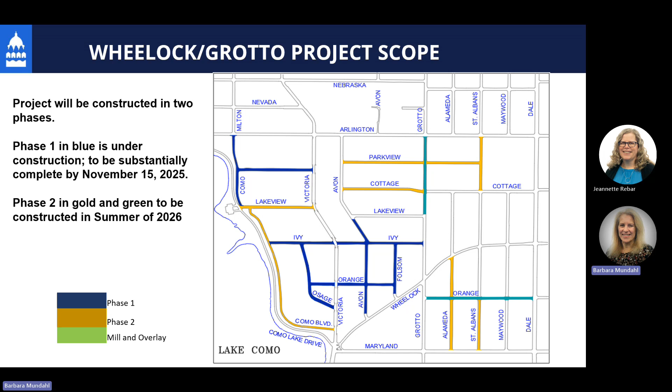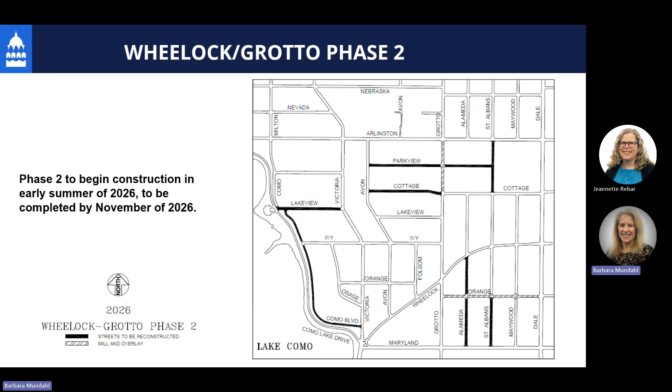Some schedule information. Last June in 2024, we sent out a notice to the neighborhood saying this is coming. This virtual presentation will be posted on the website on October 1st. We'll have an in-person open house on October 23rd at the Northdale Recreation Center.

After that October 23rd meeting, we'll have virtual office hours on November 6th after everyone's had a chance to view either one of the presentations. That open house will be to answer any additional questions.

There is a public hearing scheduled in front of the City Council on December 10th. Another opportunity to express opinions before the City Council. This is not design details, this is just approving the funding so the project can go forward.

I am happy to meet with individual property owners by appointment, and that can be ongoing throughout the winter and spring. Just give me a call with your questions.

We do plan to open bids February of 2026, and then lead water service replacement by the St. Paul Regional Water Services should begin in early spring around April. The street reconstruction will follow those lead service replacements, around May. Of course, all of this is weather dependent.

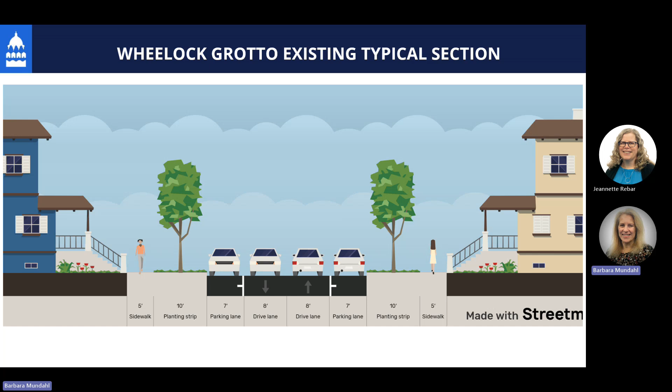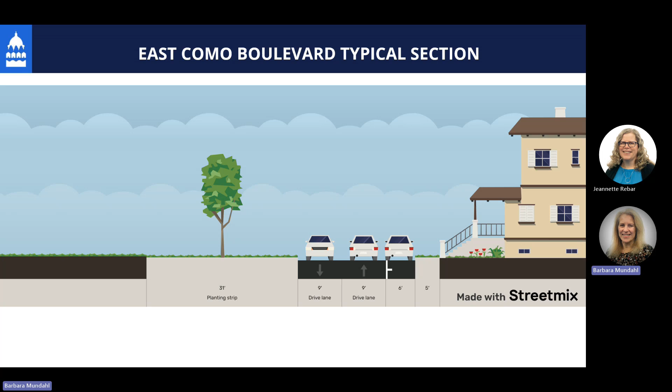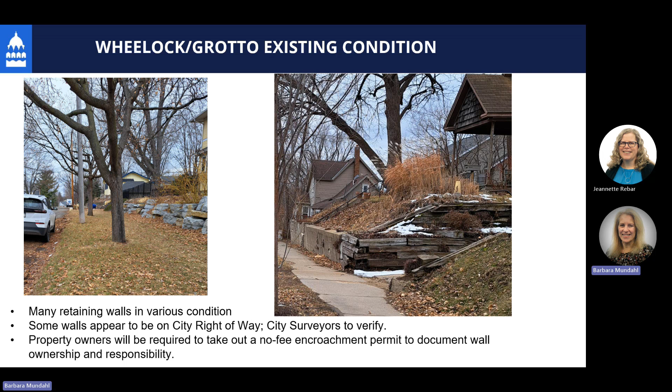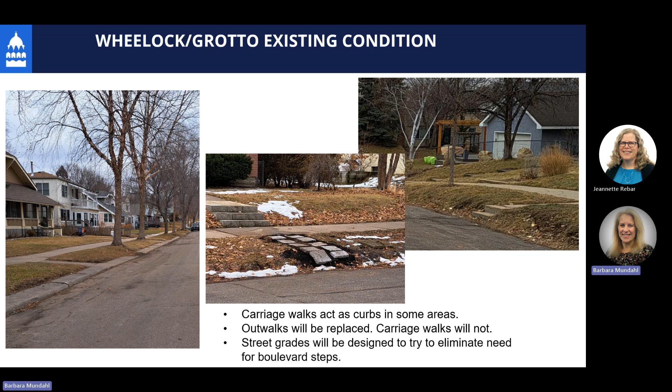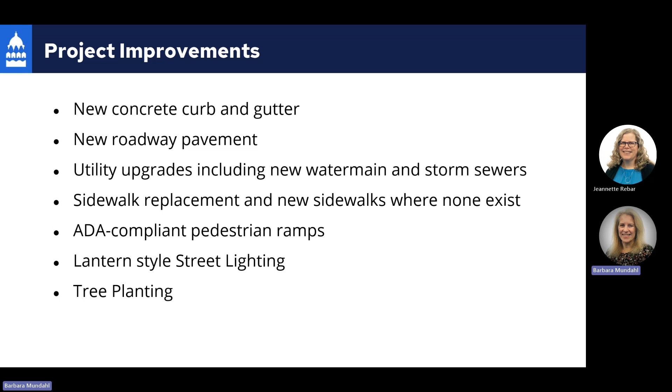The St. Paul City Council did pass a sidewalk policy back in 2017, recommending sidewalks on both sides of an improved street. There's only a couple of blocks that don't have sidewalk, and we are still looking at survey data to assess the feasibility of putting sidewalks on both sides.

If we do put sidewalks in, we will try to locate them as recommended by St. Paul Forestry to minimize impact to trees.

Some other improvements include bicycle boulevard striping, or markers I should say, on East Como Boulevard. This is not like bike lanes — it's simply the bike boulevard symbols on the pavement, reminding people to share the road for this connection that goes from Milton to the trail on East Como Lake Drive.

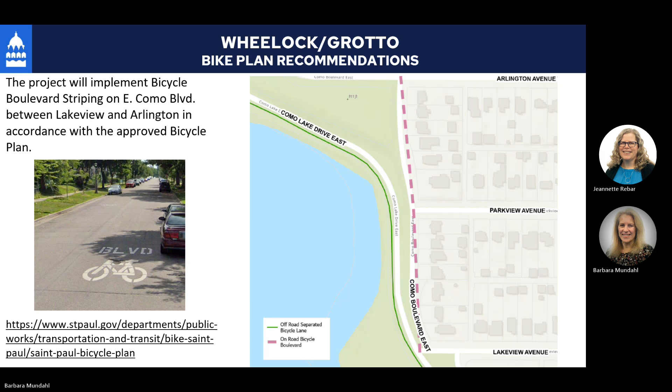We are proposing a slight change to the median on East Como Boulevard at the intersection of Lakeview, to try and make a safer crossing for bicycles and pedestrians to get onto that trail.

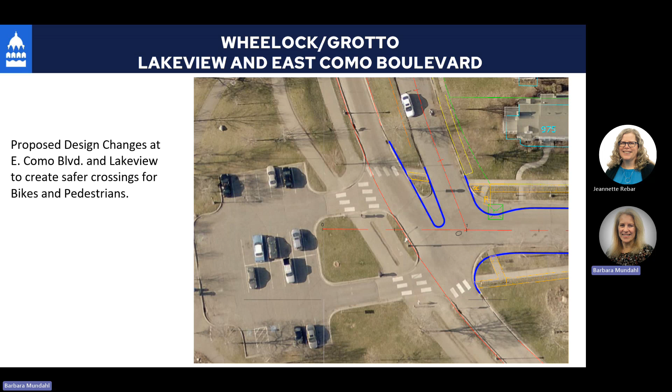We will be replacing curb and gutter, or installing curb and gutter, and replacing all of the drainage structures along with that.

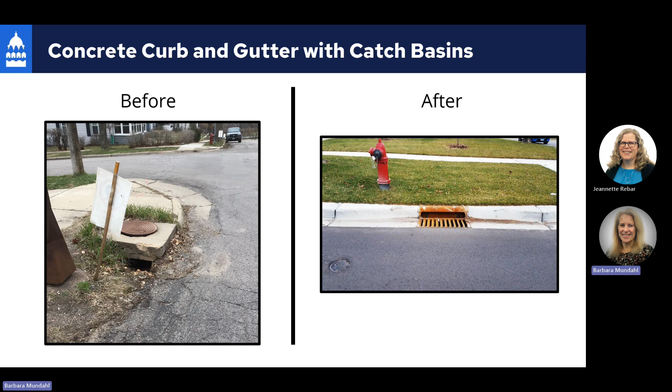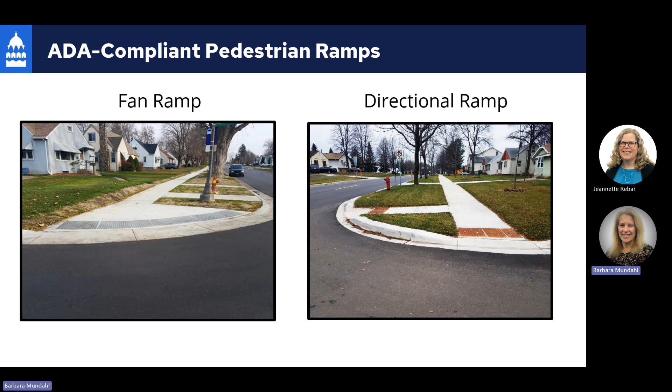We will be replacing the street pavement. Again, replacing the pedestrian ramps with ADA compliant pedestrian ramps.

We will be replacing driveway aprons with concrete, regardless of whether you have a gravel driveway apron or whether it's brick or some other special material. All of them will be replaced with a concrete driveway.

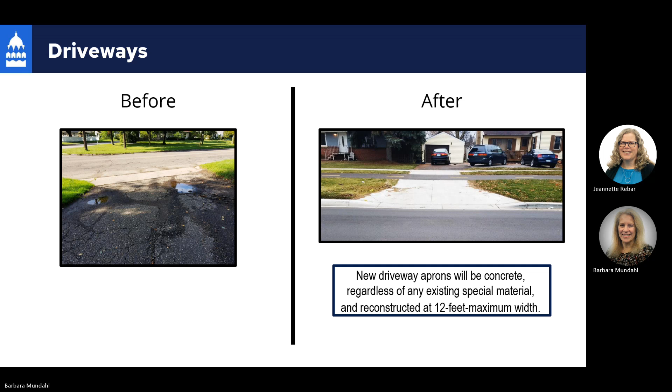We will be replacing the wood pole street lighting with the lantern style street lighting. We will be taking measures to deter wire theft from these new street lights.

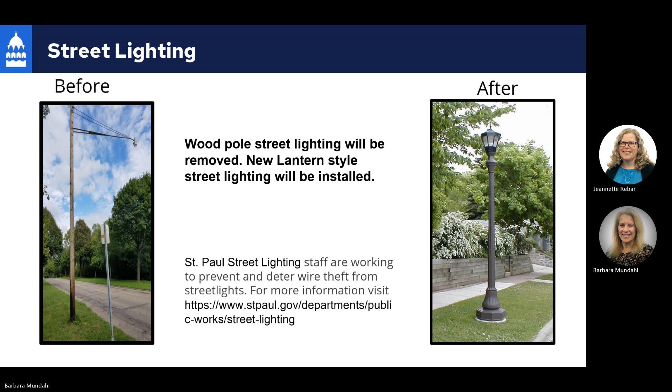Trees, there's a lot of mature trees in the neighborhood. Some of them are pretty close to where the new curb is going to be. We will have St. Paul Forestry assess the impacts of new curb on these trees.

There's also a lot of other potential impacts to trees. If you opt to have your sewer service replaced or lead water service replacement, or other utility conflicts, those could impact trees. There's the overall tree health that's taken into account, and then proximity to curb or other concrete hard surfaces.

A lot of the trees that we took down on phase one were rotting and decaying on the inside. They looked fine on the outside, but they were hollow on the inside. So again, we work very closely with forestry to assess tree health and determine which trees need to be taken down and which ones can survive construction.

These species, they try not to have a monoculture, so they vary the trees even within a block, and tree species selection will be determined by St. Paul Parks and Forestry.

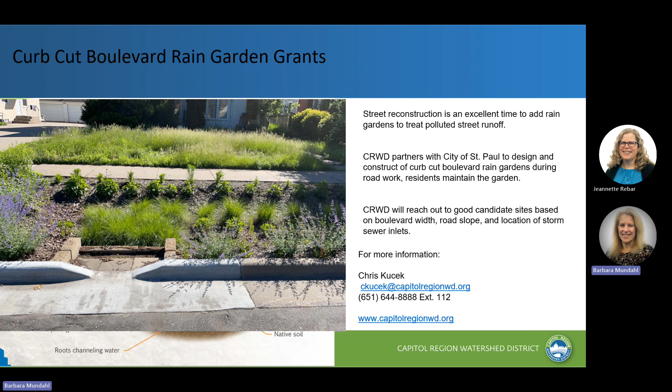All right, we've talked a lot about surface amenities, and that's really just the tip of the iceberg. There will be a lot of utility improvements with this project.

Not only are the city utilities, but private utilities often take this opportunity to upgrade their facilities. Companies like Xcel Electric, Xcel Gas, and other communication companies like Comcast and CenturyLink will also upgrade their facilities with these projects.

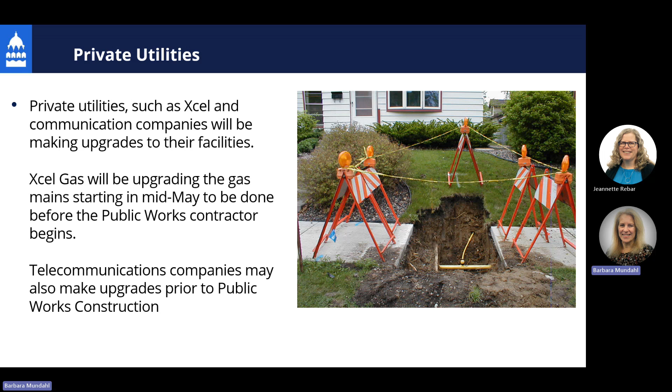And then, of course, St. Paul Regional Water Service and St. Paul Sewers will also be upgrading their facilities.

So with this project, we'll be replacing water main. It's usually about 8 to 10 feet deep, so there'll be some pretty deep holes out there.

The water main is replaced by our paving contractor under the supervision of St. Paul Regional Water. And then even after the water main is installed, there are lots of tests that have to happen before that water main is put into service.

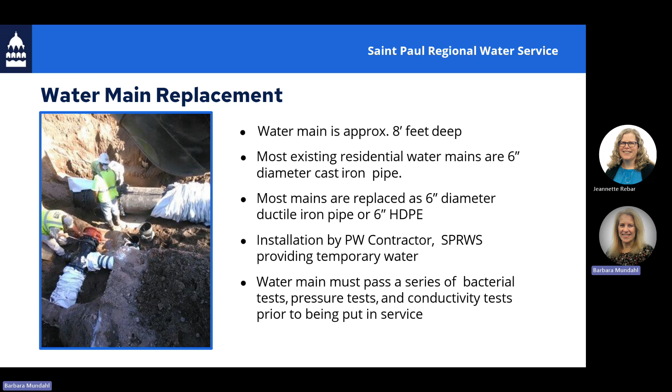In the meantime, the city or St. Paul Regional Water will be providing temporary water mains. These are the yellow pipes that you see on the sidewalk. Those will be installed and then fully bacterial tested before they hook them up.

So the water department will need to access your home to hook up to the temporary water mains. That will happen prior to the project.

They want to note that sometimes, if it's really hot out, the water from the temporary mains might be warm. Just run it and it'll cool down pretty rapidly.

And then the other thing to note is that you will not be metered for water during construction when you're connected to temporary water.

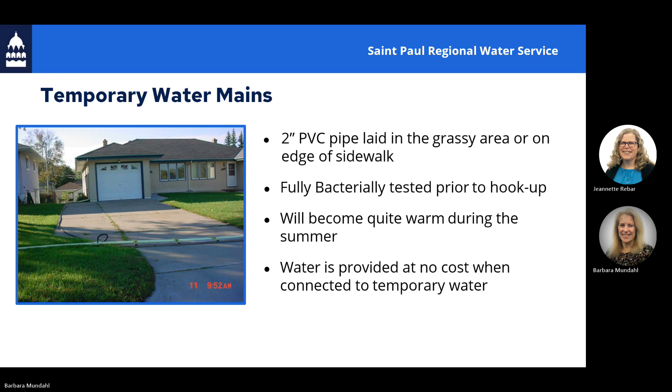And then here's just how they backfeed the temporary water into your home. They'll use a wye installed where your garden hose is connected.

Again, they will need to get into your house, so they will notify you and make arrangements prior to connecting, obviously.

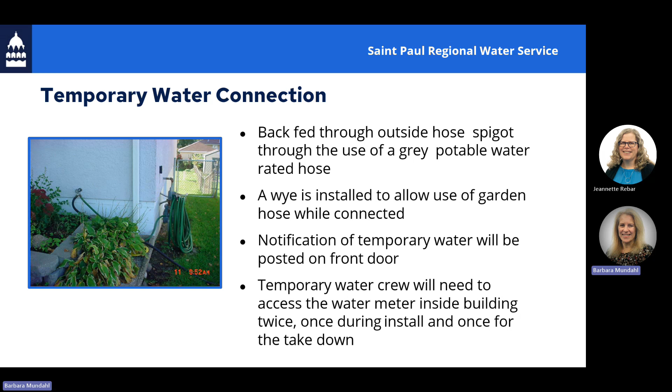After the new water main is installed, they'll reconnect to the main once that's been fully tested and deemed safe.

Most existing copper services are reconnected with only excavation at the water main, but if they're lead services, they'll be replaced with copper, and that is at no cost to the property owner.

St. Paul Regional Water will cover that cost, and there is also a program, Lead Free, for lead services in private property to be replaced by St. Paul Regional Water at no cost to the homeowner.

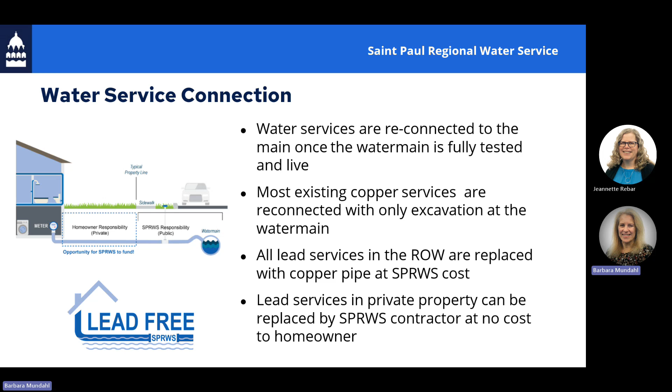And for more information about water services or water mains, you can contact Bokenya Chun. She is an engineer with St. Paul Regional Water Service.

Also, as part of this project, there'll be a lot of sewer work. We will be replacing some storm sewer mains and some sanitary mains. We are also providing an opportunity for homeowners to replace their sewer service from the main to the property line.

There is an additional assessment for that work. And then there is also the private side between the property line and the home, and that work would need to be done by a private contractor hired by the property owner.

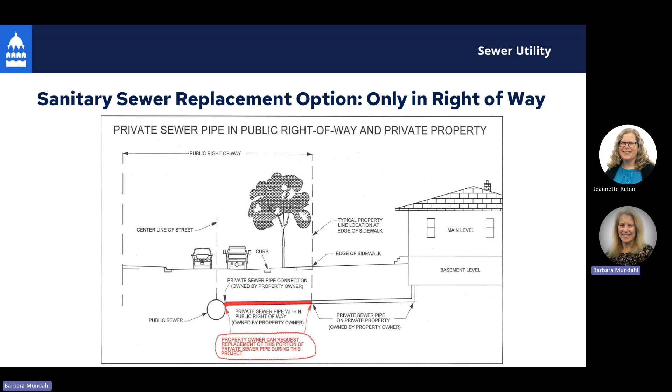Again, just another visual of your private sanitary sewer service.

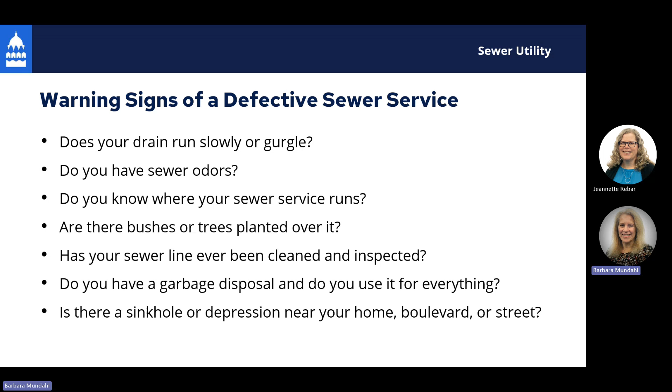If you're experiencing any of these symptoms from your sewer service, like slow drains, sewer odors, sinkholes, it could be time to replace your sewer service. Some common problems we see are tree root intrusion into the sewer service, and another common problem is that the connection between the sewer main and the sewer service can sometimes drop.

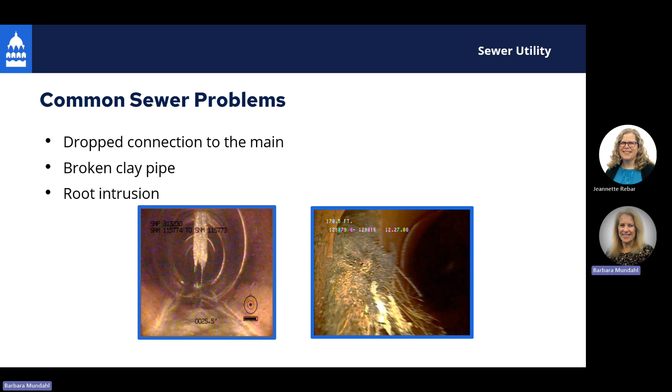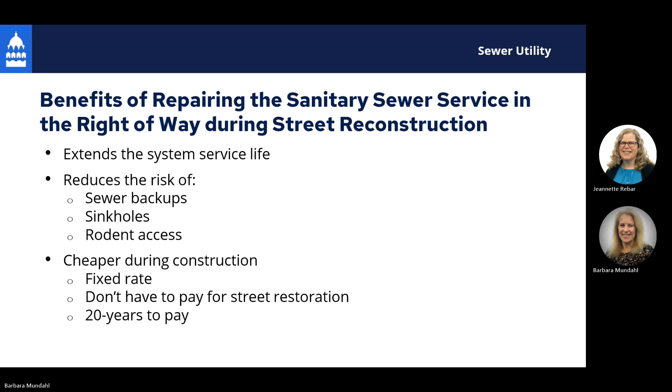Those are also good reasons to replace your sewer service as part of the project. Some benefits of doing that during construction are that you don't have to pay for the street reconstruction or restoration, and it's at a fixed rate that you can pay over 20 years. Usually during construction, the cost is approximately $3,500. But if you wait until after construction, including restoration costs, it can be up to $5,000 or more.

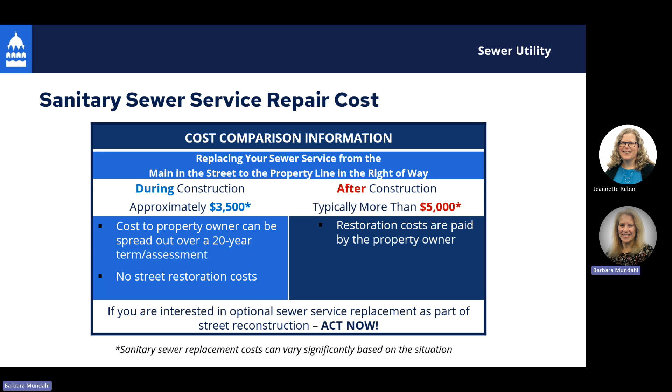Just to back up on sewer service replacement, the sewer department will be sending out waiver forms this winter with more explanation and information about your individual sewer service, explaining that process a little more. The sewer waiver would be sent back to them, and then we can put it on the plans for reconstruction.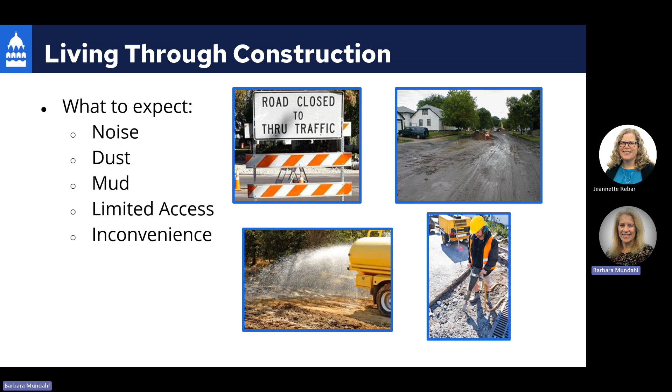What's it like to live through a construction project? Many of you are experiencing that adjacently right now. As you know, it's noisy and inconvenient. It's either dusty or muddy. We do have specifications stating that the contractor needs to wet the surface to try to control dust and mud, and sweep up mud as they can. But it's a constant battle.

Some other things to know: your street will be dug up numerous times because there are different contractors doing different types of work. A private utility might dig up your street to replace the communication line, and then two weeks later somebody else is going to dig it up to replace your sewer service or lead water service. There is a method to the madness, but it does happen that there will be multiple excavations on the same street sequentially.

Plan on 4 to 5 months of disruption for the entire project. That doesn't mean 4 or 5 months in front of your property, it just means 4 or 5 months for the whole entire area. They are required to maintain vehicle access to businesses and emergency vehicles at all times.

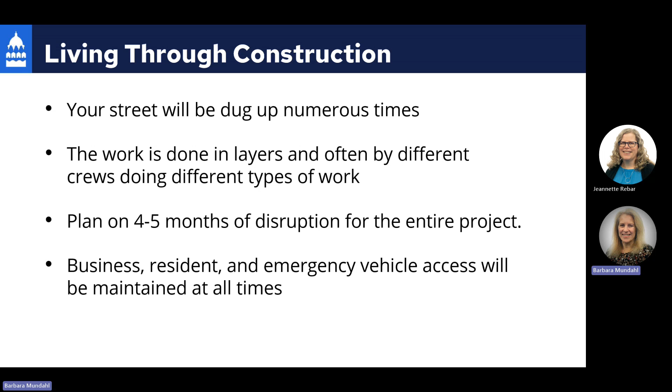All of the construction is done by private companies. We bid them out - they're all licensed and bonded, but it does go to the lowest bidder. A lot of road work is weather dependent, and rain will delay the work. If we get a lot of rain, they may wait a day to let things dry out before they get back on site.

Contractors work 5 to 6 days a week, 7 a.m. to 7 p.m. And the city of St. Paul will have an on-site inspector to inspect the contractor's work.

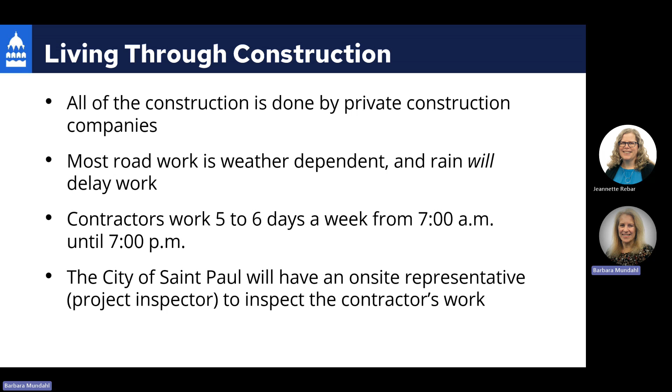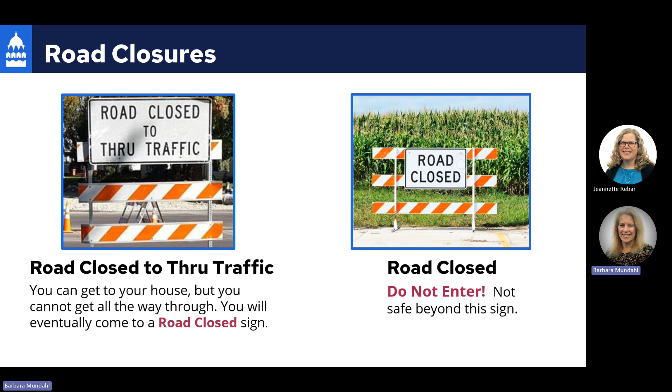There's two types of road closed signs that you will see once construction begins. A 'road closed to through traffic' sign means you can go around it, but you're not going to get through to the end of that street - it'll maybe be to mid-block. Then there's the 'road closed' sign - that means do not enter, it's not safe. There's probably a big 20-foot deep hole beyond that sign. So you can go around these, but not these.

You will receive multiple letters from me during the design process, and then a letter prior to the start of construction. It's nice to keep that one because it'll have the names of our inspectors who are your first call, plus the contractors and other contact information that is handy to have.

They will flyer the neighborhood a week before construction starts on your particular block - they hang those flyers on the front door. As I mentioned earlier, the assigned project inspector would be your first call because he's the one on site and knows the schedule to the minute. And of course, we will have weekly updates posted on the city's website.

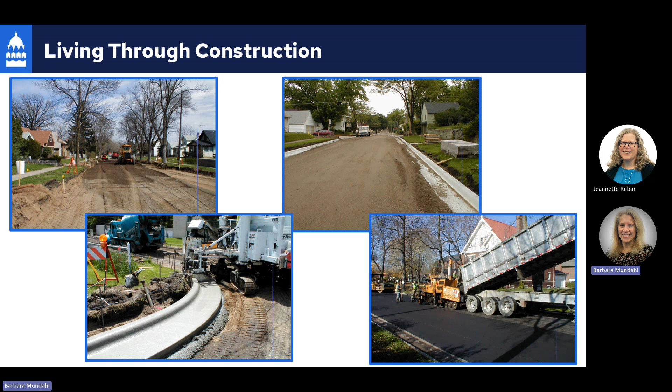And then, of course, what is it going to cost? Assessment rates have not been determined yet. There will be an independent appraiser coming out to look at properties. There is a separate assessment video that I invite you to watch to explain more about assessments. You can view more information at stpaul.gov/assessments.